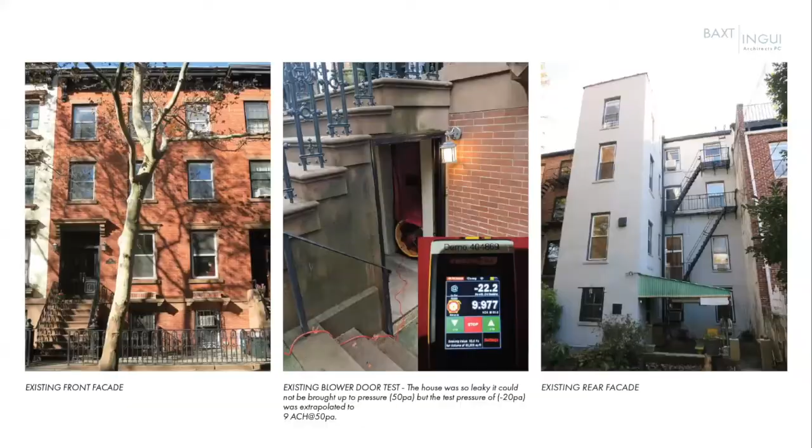So what do we do? We do a whole bunch of different types of houses. We've done, I guess, about 8 passive houses now certified. We're working on 14 of them now. One of them, Amy, who I think is on as well, is working on. It's a NYC Buildings of Excellence project. It's a cool house, a firehouse that we're converting into residential with community facility below.

We're working on a carriage house in Brooklyn with Mark. We're working on a ranch house out in Long Island, which is going to be a retrofit of a stick frame, our first, which is kind of fun. I like that our first passive house outside of the city will be stick built. And then we're working on the Highland passive house with Kathy Hobbs, and that's kind of fun because it's upstate and it's a prefab multi-use building, and Chris Corson is going to be providing the panels from Ecocor.

So we do a bunch of different projects. We do a lot of historic masonry retrofits, and that's what we're talking about today. That's why this house is up. And we love these houses, and very often people come to us just wanting a really great house that will last generations. They don't know to ask for passive house, they just know they want a really great house. So when we describe the attributes, that's why we do it. They want those things because they want these houses to last for generations.

This particular client came to us wanting a passive house, which makes this presentation that much more fun. And Kevin, who did this initial blower door test, would have needed 2 blower doors just to get this house up to speed in terms of being airtight.

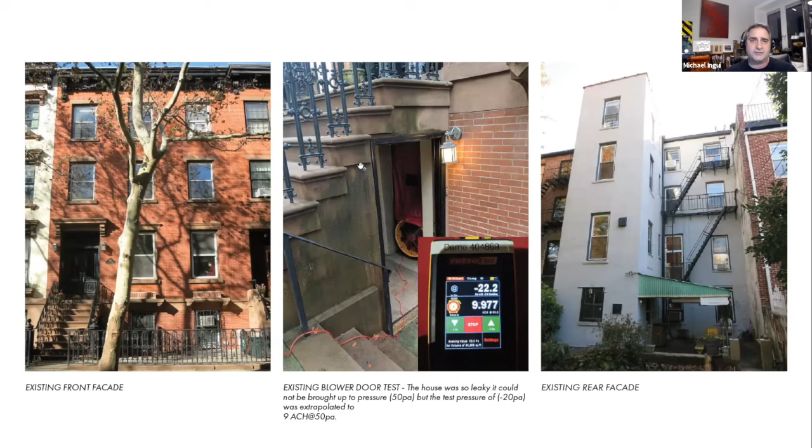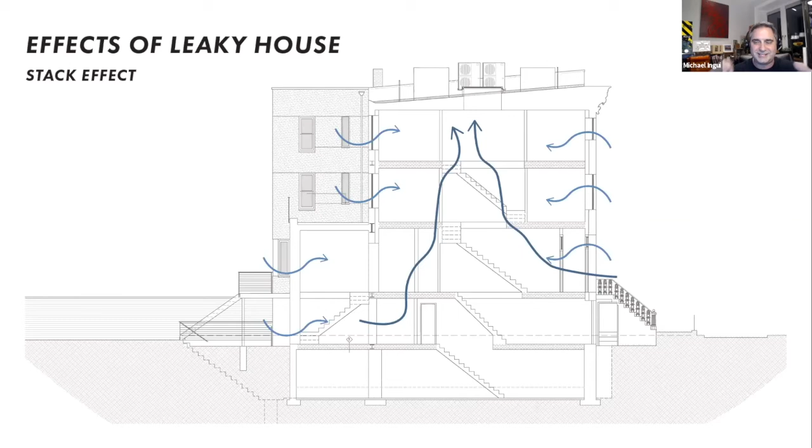So again, these are beautiful houses, lots of history, but what are we looking at? What does a leaky house mean? Because I always feel like we talk about it, but what does it really mean? Everybody thinks about leaky air coming in and out of windows, conditioned air out, bad air in. But especially in townhouses, even in a 2-story or 3-story house, you've got the stack effect, naturally bringing in air from the outside. It's not really bad from the outside, but it's going through all these cracks and crevices that are leaky, that bugs crawl through. You're getting your fresh air from places you weren't expecting.

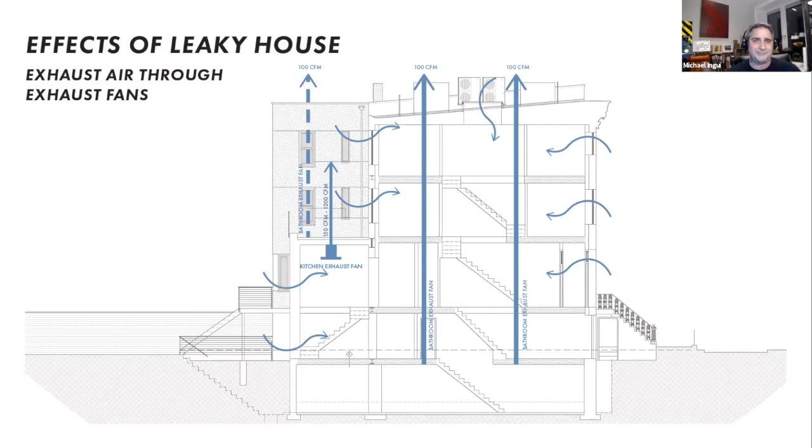And that's only exacerbated by these exhaust vents. Some of the houses we've been doing have these monster hoods that are pulling all this air out of the house. Well, that fresh air has got to come from somewhere, and you have to ask yourself where. And then this is a beautiful house that we've worked on. You've got some really great things here. People want to live in this house with its gorgeous exterior, but on the interior, it's just not that much fun to live in.

It has that old house smell, which is not healthy, and it's not a good smell. You can see the shutter that's been warped for years because of water infiltration. You can see all the water damage from the radiator.

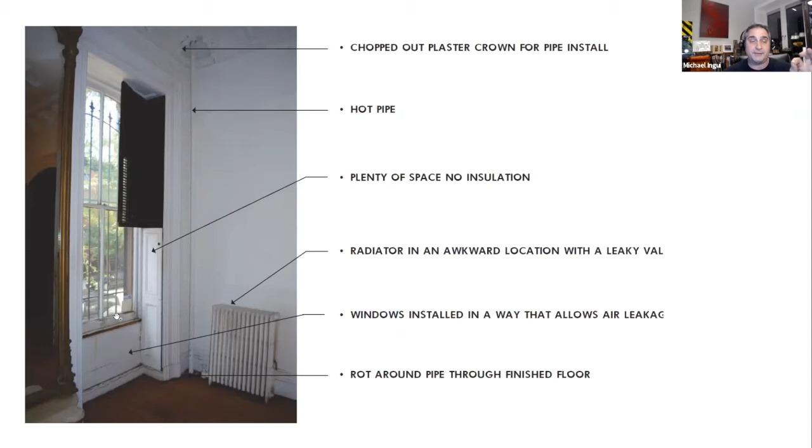I'm pointing, but I'll use my mouse now. You've got the radiator pipe that's broken plaster at the top. You can see this yellowed foam at the bottom, and it's leaking air. So you've got pipes held up by columns of CMU, pipes that have all sorts of penetrations from the boiler room. God knows what's making it up into the living space.

When we take the plaster off of these buildings, and this is the building I'm talking about today, you can start to see we did some joist repair—we'll talk about that in a second. But you start to see things that are interesting, like, although I'm sure the flue next door isn't leaking that much soot into the space, it's leaking some soot. You have to ask yourself, how much do you really want in your house? And how long has that been happening?

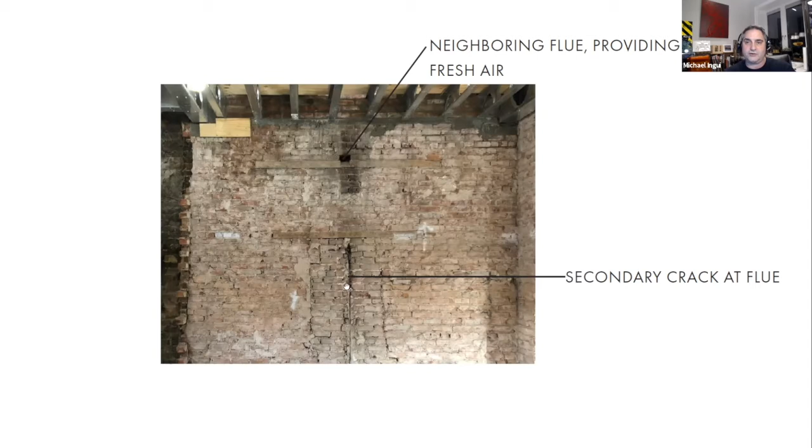Then you start to see cracks down here as well. This is where we're getting some fresh air too, when you turn that exhaust fan on. There's nothing wrong with this—it's structurally sound, but you've got cracks in all these joists.

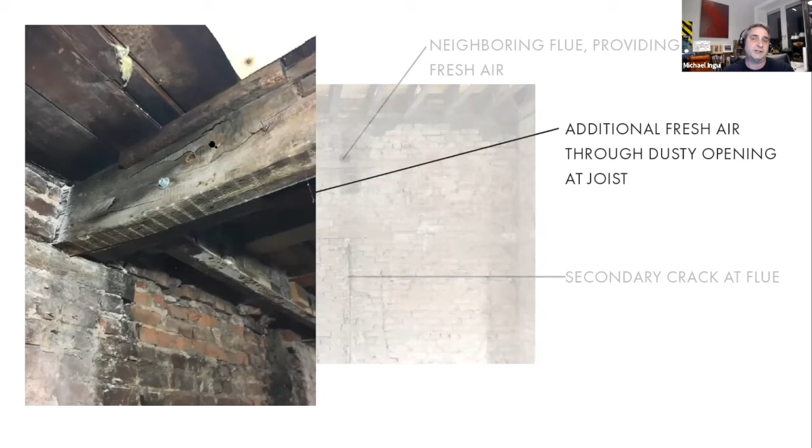We have a responsibility, and it's one of the things Ben has really emphasized in the office for years and years, and Passive House fits it well. We have a responsibility to fix this stuff. We're going to be the last ones touching this if we do our job well for 100 years. So how do you increase that shelf life?

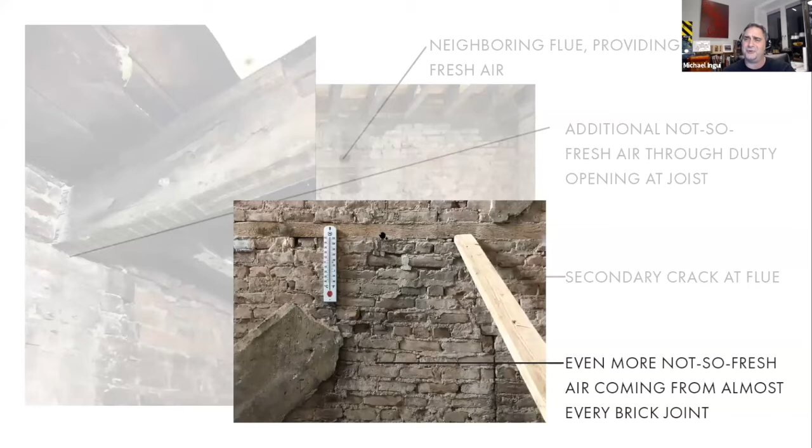Same wall with the plaster recently removed—you've got air coming through all these cracks. I mean, all these cracks. So it really provides an issue. It provides a health issue.

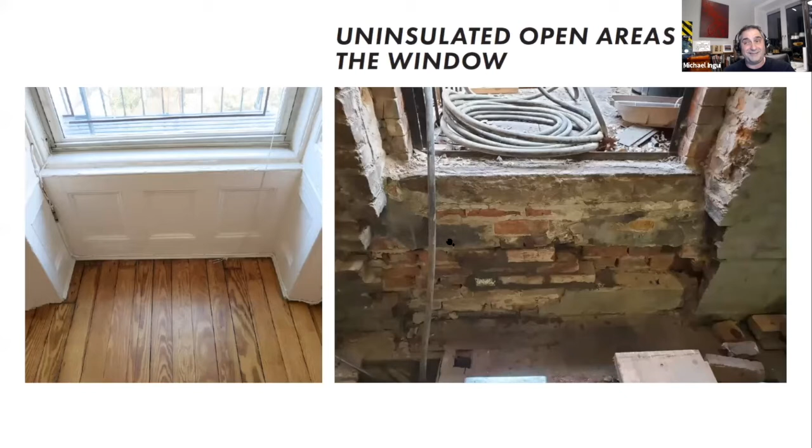So why are my windows drafty? We're always asked this question. It's because behind that panel, I've got that brick. You can see we started to repair this, but these bricks are coming out by hand. The air is just coming right through. It's not better on the side of the window, and it's not better at the top of the window, where I even have a cracked lintel. This is pretty typical—very often the windows themselves aren't great, but the area around the window isn't great either.

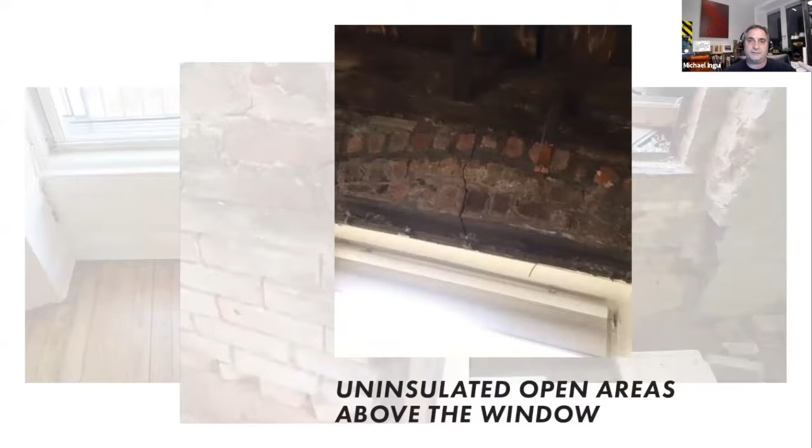This talks a little bit about—and I promise everybody I'm going to spend two slides on this, I condensed it because I talk about this too much—but it's just talking about Passive House in a different way. It's really talking about it for the health benefits. I don't even like mentioning the word Passive House. It's just not useful.

Next question—and Owen, who's also on, Eoin, Owen—Owen didn't do a Passive House before this. I never heard, well, not this house, but I heard about Passive House for the first time at some point. But Owen built beautiful homes. Owen was a great carpenter. We knew Owen could do it, and we didn't want to find another contractor to do one of the Passive Houses. So Owen's first Passive House just happened to be the first Passive House in a landmark district.

And we had a great team. Kevin was on it. Sam McAfee, who's on this, was the Passive House consultant. Bob DeVillio was the mechanical engineer. Amy, who's now a principal, was the architect on this project. And this was a great project for lots of reasons.

There's some familiar young faces here, by the way, with big beards. We've done some more—this is a Zola contractor collective where we did window installs. This is not a contractor collective, this is just a big open house. And we've done more after that. This is a repeatable approach.

These contractors didn't want to come into that collective meeting at the beginning, but at the end, I mean, they love them. They miss them. If we don't hold one in 6 months, they all want to know when's the next one. This particular one, half of these contractors have done them, but 3 or 4 of them hadn't, and it was really helpful for them. They can see it, and all of a sudden it's not a scary thing anymore.

So Owen was the first one to let that happen. Then we've got this cool certified project he did in Manhattan with us, where we did a lot of restoration of the front facade. Mark from our office was the project manager on this.

And then we've got this project with this team. Just spend a little minute while you look at their faces. The interesting part about this project is I got an email last Friday from John telling us, hey, congratulations, you guys hit 0.5. You're going to be a Passive Plus house, which is great because I think it may be the first one in a landmark district. But that's not what's interesting.

What's interesting is we passed a test on Tuesday. On Monday they had like a 0.6 something, but Owen's like, no, this is a 0.5 house. So he asked John to come back with the blower door, and apparently there was a door open or something like that, or there was a trap open. And again, it was a 0.5 house, but there's no pizza party. I like pizza. There was no beer.

I wasn't invited to that. I didn't know what happened. I didn't know until 4 days later because that was just a Tuesday. That's what Owen does. Now Owen does passive houses, he does them a lot. He doesn't need a lot of hand holding. We're not really policing him. And so he's gone from a contractor who didn't do a lot of passive houses to right now, yeah, 0.5 was just no big deal.

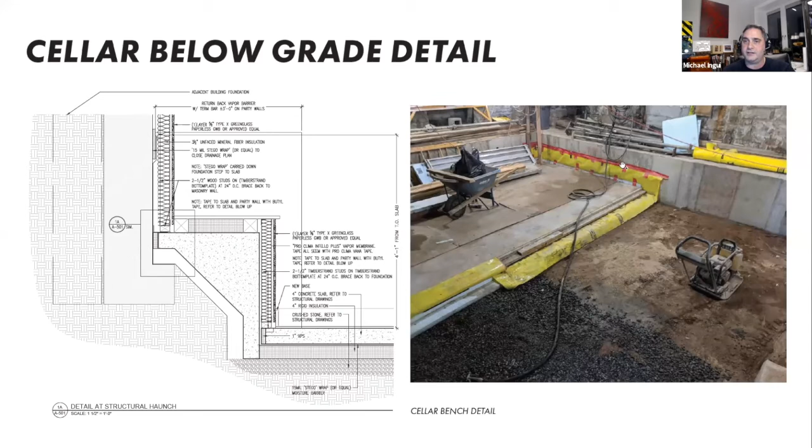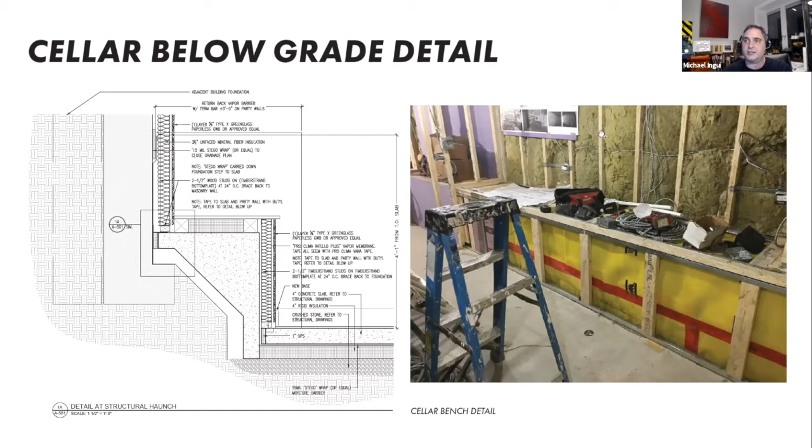So you see this red line right here, and you can kind of see the detail here where you've got that layer right there. Well, here's that same red line, and you can see how Owen made sure he had that tape mark right, made sure that he could wrap this up. Then you've got your rock wool, you've got your purple board that continues through. We're not quite done with this yet.

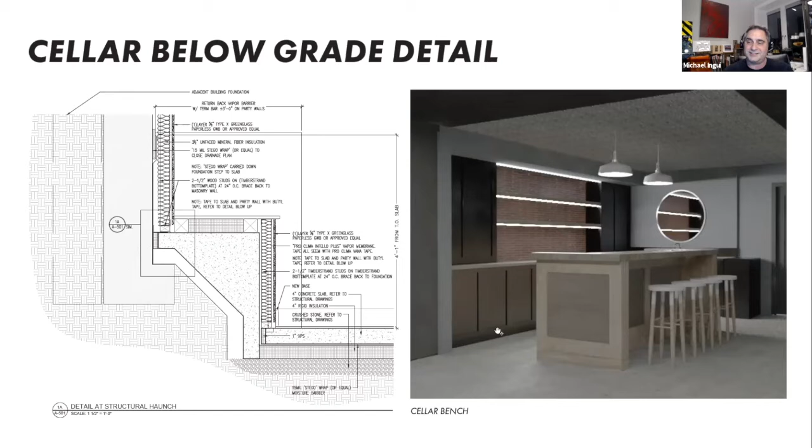This is where we're going to do our pizza and beer party to satisfy my needs there. And it'll be a beautiful bar - you won't be able to see anything. There's nothing here that says passive house, absolutely not one thing. But it's below there, it's under there, and it's going to be a wonderful, warm, dry, comfortable space.

So coming through, there's really good lessons we've learned. And again, I have to thank Owen and a whole bunch of other people, Sam and Kramer and John and Ed. We've dealt with a lot of annoying issues, ghosts that you're just finding forever. And one of them is the annoying box beam, where you've got these seams at the top and bottom.

Then there's just simple solutions that we can share, where Owen puts this plywood on the end, wraps it with the self-stick building wrap, preps the pocket, and it really allows the Sto to stick to it well, but also you're not getting that mysterious flow of air coming through here.

This actually isn't the box beam, I didn't have a close picture of that, but it really works well. You wrap these, it works well with the Sto. You can kind of see they've got the rapid seal there. We've used a bunch of the liquid applied products.

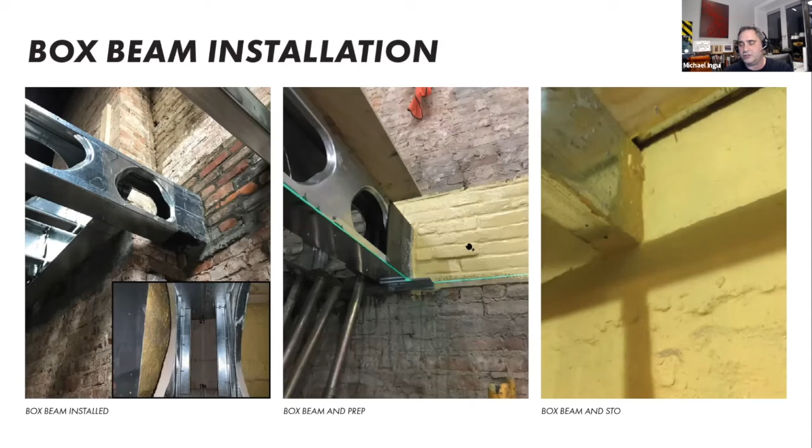Owen really loves the Sto. I can say the liquid applied products have made a huge, huge difference to our projects.

Coming into that front wall, and just to continue thinking about sequencing, putting this strap on and prepping before you do it means I'm not going to worry about it — this is helping hold back this front wall in ways where I don't have to take that front wall down, and I can save it there for generations.

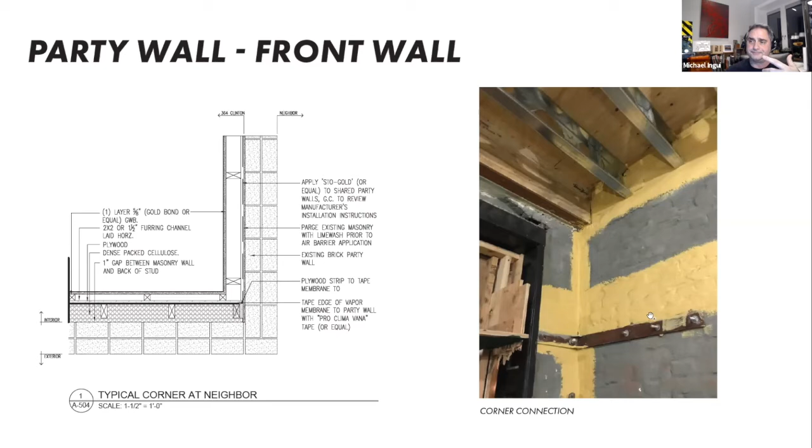Prepping it even more, you can see the Sto on top of that, and you can start to see the plywood at the front. Owen really likes to use plywood. We use some of the intelligent membranes on a bunch of our other projects. We don't tell the contractors what to use — they all have their favorites. Owen likes plywood; he can talk to you about why after this.

He's going to be on. He's already on.

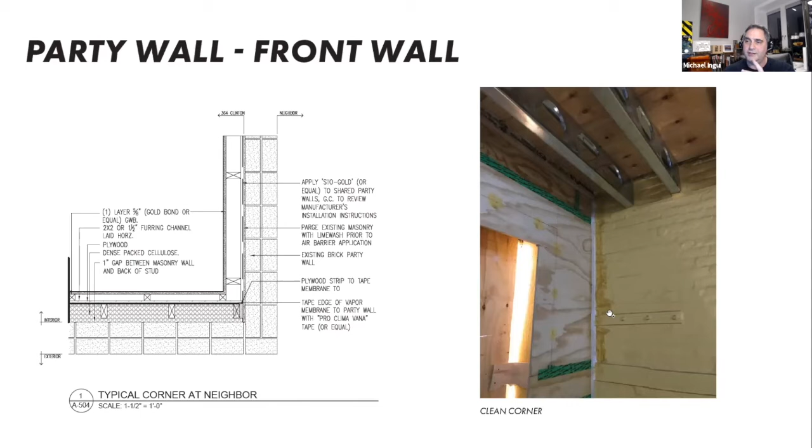But you can see the nice clean corner, and the amount of time that you really spend in the corners. It's belt and suspenders and maybe an extra belt, because they're never going to be able to get into that corner again. Once you start to put this framing in, it's difficult to get to.

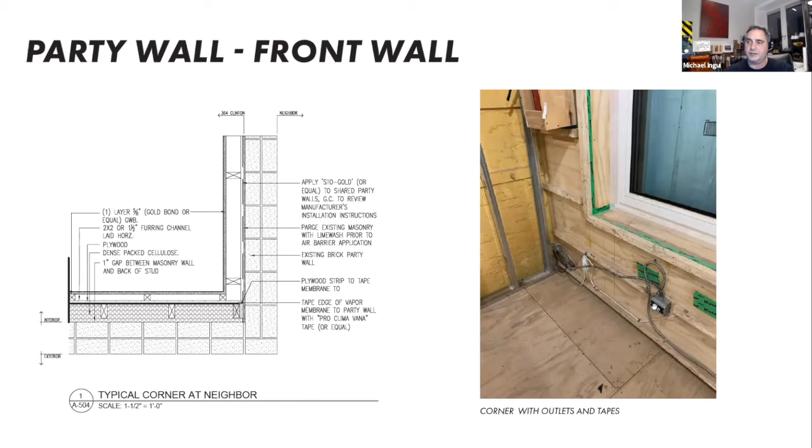You could start to see a bunch of other cool things here. Nobody's going to penetrate that air barrier except for Kevin. You can start to see his holes here for his cellulose. You can see the service cavity where that's been created, where you can do both your typical electric and your low voltage. It's a great place to run things, and it really simplifies things quite a bit.

Talking a little bit about windows, which you got a picture of there — this is another huge element, and Cory Herrala from Landmarks is going to speak after I'm done. There are hurdles that we can't get past without having partners in crime — well, partners like Landmarks. New York City Landmarks has been great.

Getting these simulated double hungs approved — this happens to be a Zola simulated double hung — we used to have to do it at public hearing, now we can do it at staff level. Having them really work with us and these European manufacturers to get these rails and stiles small enough, and these mullions to work well enough where we can get these approved, is the difference between a client saying yes to Passive House and no to Passive House.

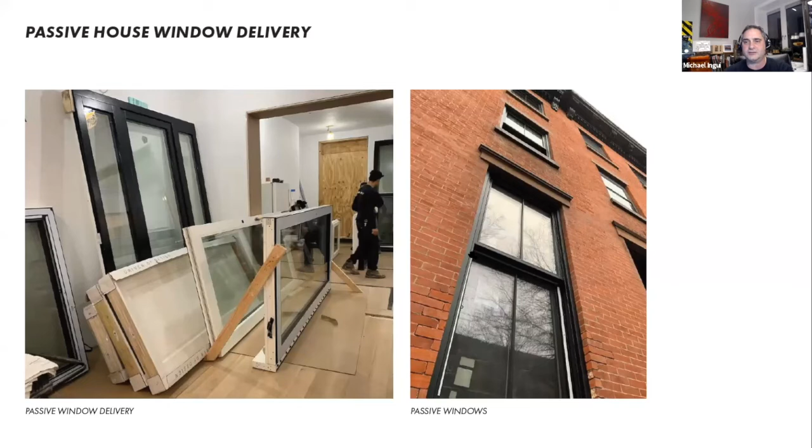If I can't get my Passive House windows approved by Landmarks, I'm not doing a Passive House. And it's that snowball effect that just goes backwards. So it's really nice to get these approved, and you can start to see the installation of these.

I could spend a lot of time on this — we debate these continuously — but you can start to see the detail where we've got our stud that allows for continuous insulation. There are two or three moments where this is blocked in and you've got the direct connection, but for the most part, it's fully insulated.

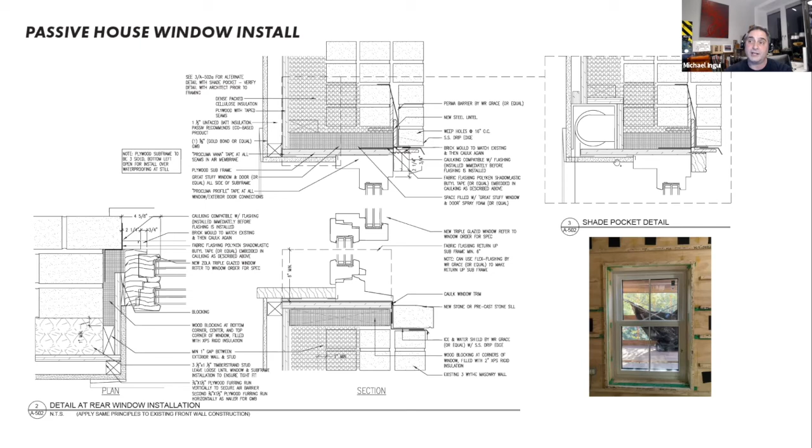You can start to see the top — again, there's a block in the center. You can start to see that window installed. Sometimes we do the shade pocket at the top, sometimes we don't.

You can start to see here's that wall framed. In fact, this picture — we modify this so much in the debates, and the amount of time that people in our office and the contractor spend working these things out — it's kind of fun and interesting.

But now we've moved this stud further into the space, so as you can see, the plywood can just pass right through this. We're always going to have a situation where our brick's going to sit up against that brick, so we have a little bit of space here so that plywood can fly right through.

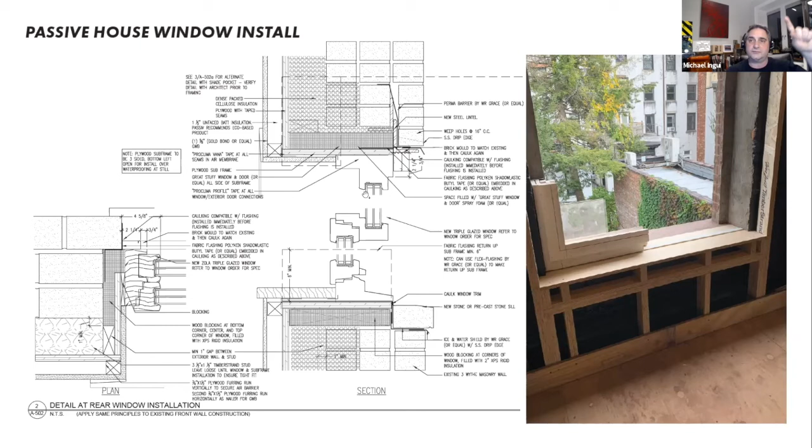So just moving that stud out an inch or two has made yet one more subtle change to what is a really difficult thermal bridge problem in all of these houses.

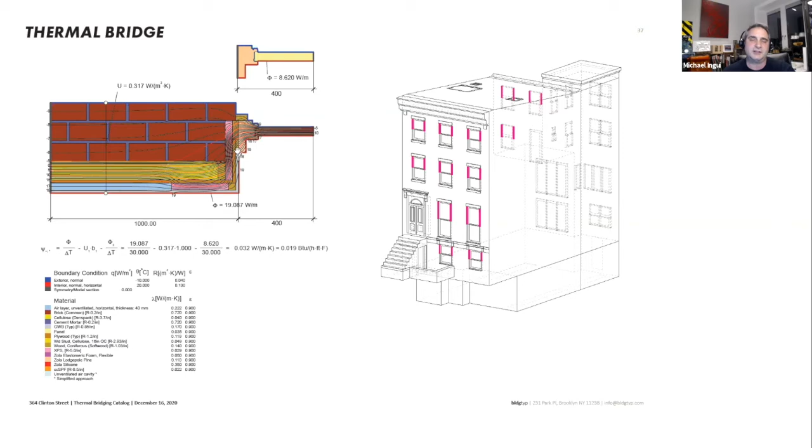John is going to talk in the after hours, and I think John's presentation is totally worth staying for. This is how John and Ed from bldgtyp start to look at things, and they're really helpful. We include them from the beginning. I'll save more on Passive House consultants for later, but the one thing I will say here is they de-risk this issue. Having this go through your Passive House planning packages and having this tested, seeing where they think the moisture might go or might not go and how much to insulate and how much not to insulate, it de-risks it for the architect. We'll talk more about that when they come on.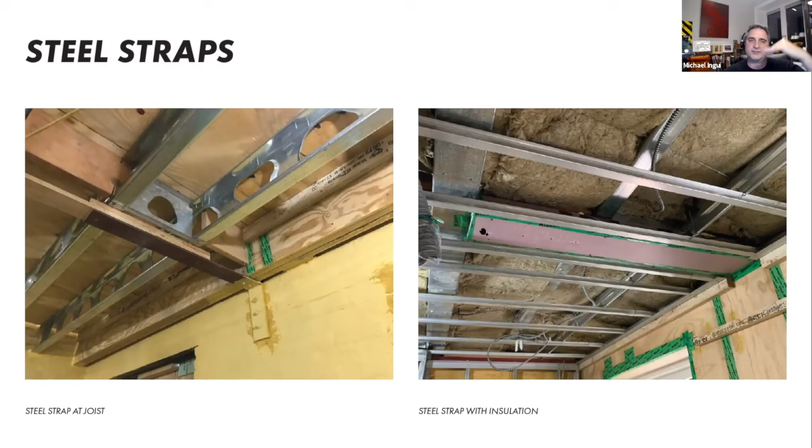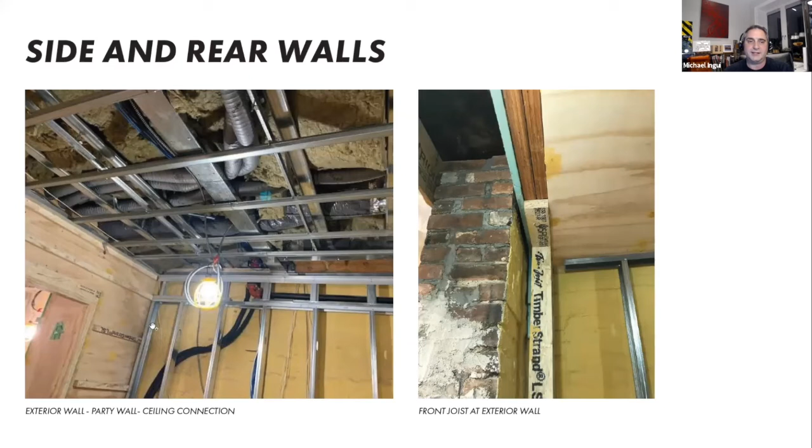We've got rock wool here too, which we use everywhere. We use it because it's helpful as a house kind of moves in, but it's also great for sound attenuation. You can see the front joist removed off that front wall with the rigid insulation, nice and clean. You can start to see the ERV tubes, and again, that corner detail—you're never going to get to that corner again, so prepping it the first time is really important.

You can start to see here, you've got that service cavity hitting the side wall. You can see they've got plywood attached to the wall and then the stud attached to that, kind of removing that thermal bridge again. You can start to see the penetration for a light fixture outside, and this really cool product—I believe this is from 475, can't remember who sells it or makes it, but there are a few products out there who do this now. Really nice solutions to what could have been difficult problems.

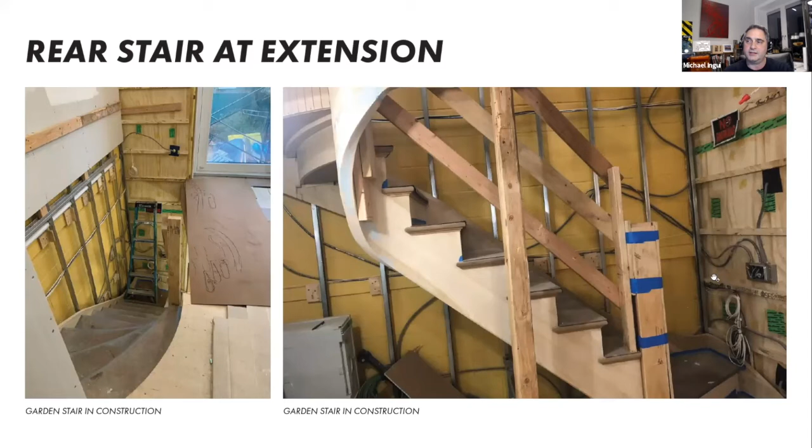And then kind of working all this out and testing it before the sheetrock goes on is pretty important. The blower door is really quite the important tool on all of our projects.

And then getting to the end, which is nice for you guys—sorry, talking a little longer than expected—but we've got our roof. We're up at the roof and we do go to wood joists at the roof where we can, trying to reduce that thermal bridge.

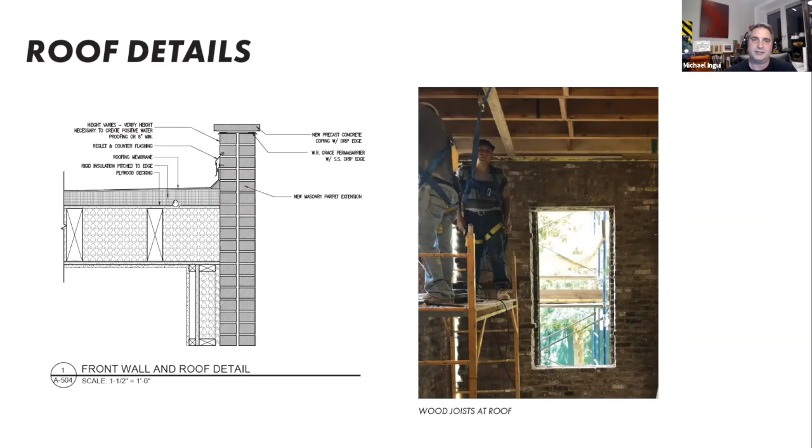We do insulate. This is another great place where it's good to have Passive House consultants. I'm like, yeah, let's do 50 inches of insulation on the roof. And John and Ed are like, no, let's check to see where the dew point is. They put it through the program, and they tell us where it should be. So we're doing 4 inches on the outside and the rest inside. It's just helpful, and again, it's worked out—it's tested, it's in the model. It's de-risking that issue.

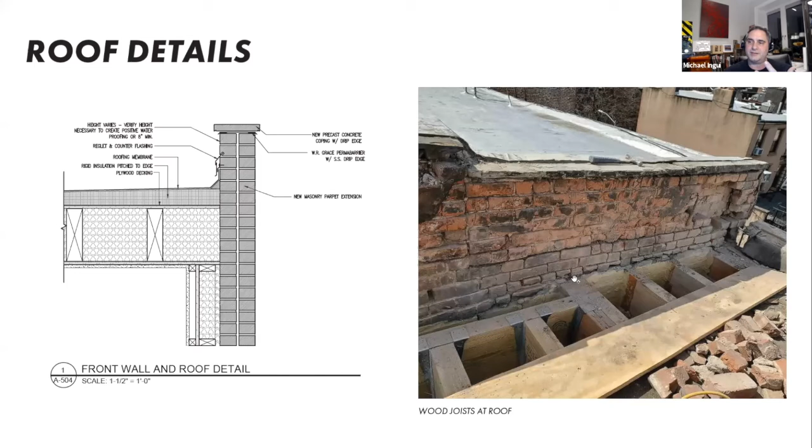Very often when we're starting these jobs, the roof is not in great shape—a lot of times they have asbestos on it. You remove that asbestos from the parapet, it's ripping brick off. So really being able to repair this and then put that rigid insulation on before you get the clean roof on is really, really helpful.

This is a Passive Plus house. It's also an all-electric house. These products work really, really well.

This is for another presentation as well.

Besides the fact that this Fisher & Paykel induction range wasn't out when I did my house, we have all these in our house. We've had them for 4 years and they work out really well. This Whirlpool dryer is yet one more example. We have clients who, if they couldn't get a full-size dryer, might not do a house without gas. But this gas Whirlpool and that heat pump Whirlpool are the same size. It takes a little longer to do the clothes in the Whirlpool, but it's not a big difference.

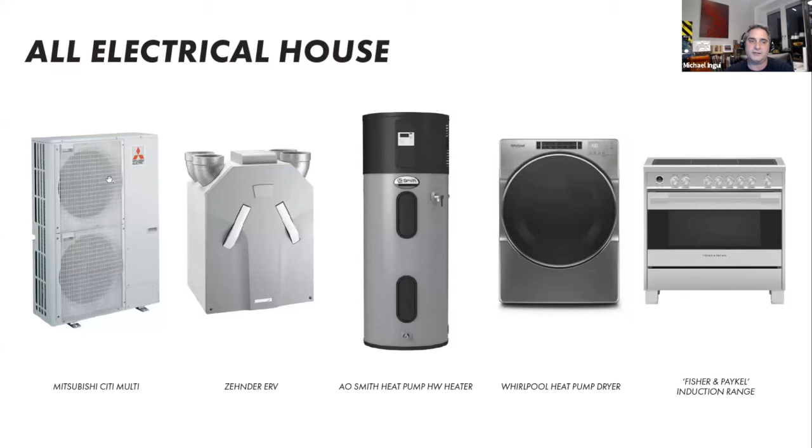You've got the Zehnder ERV, the Mitsubishi, so it's an all-electric house, which is really, really helpful. And getting that skylight, getting that natural light down.

This is a 5 foot by 5 foot Lamilux skylight. This is when the architect is not on site. They're incredibly heavy, but they're single pieces that go down. They're already flashed, they're already worked out.

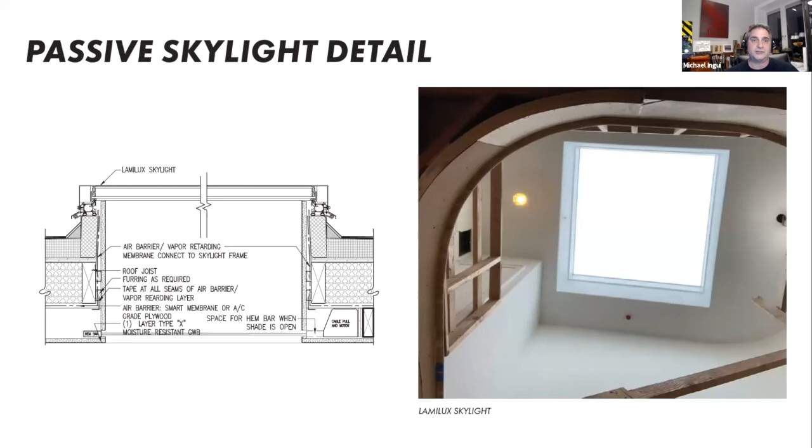They're really nice skylights. This one happens to be, the shade is on the interior. We've done exterior shades before, but they get kind of dirty in New York pretty easily, so you have some serviceability issues, but this is a nice interior shade.

You can kind of see there are no lights on when we're doing this, and it was kind of cloudy that day. You'll see it in the next photo, and it just lets light in. So again, daylighting, reducing your electrical load. These are things you don't forget about when you're doing the passive house.

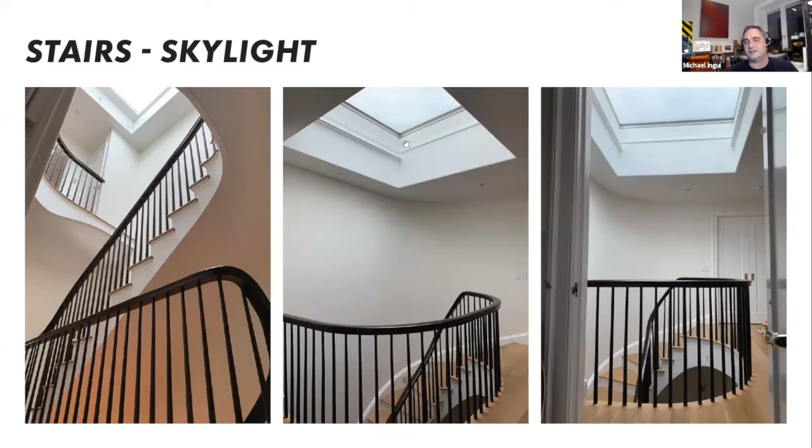The fire department requires very specific access points around skylights and clear paths, which tells you the maximized amount. In this particular case, we were able to get them nice and low. You can't see them from the street, which is nice. But that is what results in being able to get to a Passive House Plus.

And maybe you can talk just for a couple of minutes about that, or a minute or so, before I introduce Cory from Landmarks.

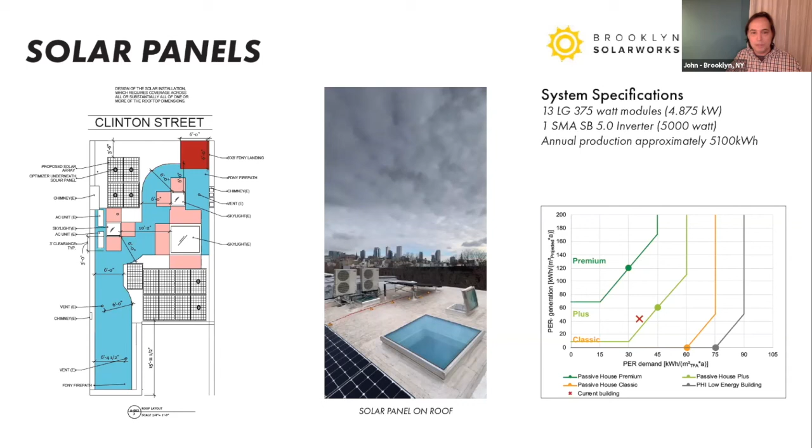Thanks, John. John's going to talk again in the after hours. It's a good presentation—it starts to talk a little bit about working with Passive House consultants and how we've been working with them, and how John likes to work. It's really, really helpful.